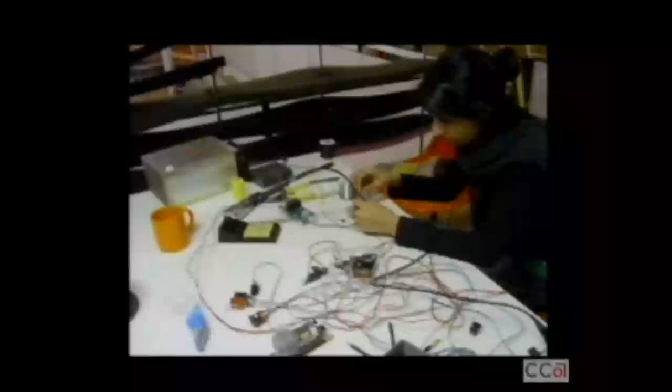We worked with Parul Vora from the MIT Media Lab to do the programming and the hardware. Basically, this is a diagram of the wall. It's supported by hollow tubes, and clamps onto the tubes are a series of interactive infrared sensors that detect proximity. These in turn signal microprocessors that activate servo motors that pull the bands of foam apart, creating sudden apertures in the wall. We started by testing one sensor in our office and then eventually built this up.

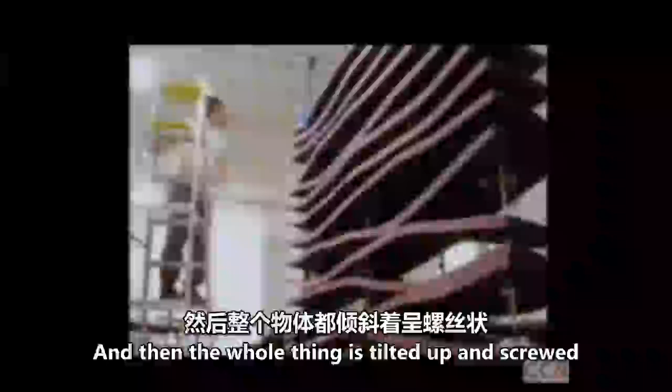So the construction logic is basically a shish kebab. All the pieces are laid out on the floor and then, like a shish kebab, skewered into the hollow pipes, which carry all the electrical and data wiring. This is an example of one of those locations. And then the whole thing is tilted up and screwed into the ceiling.

This is a close-up of one of those servo motors that pull the bands of foam apart. The section on the right is the at-rest state, and the section on the left is when it detects your presence. So this version of Party Wall responds to proximity, but we really imagined it as a prototype that would respond to heat or light or sound in other future iterations.

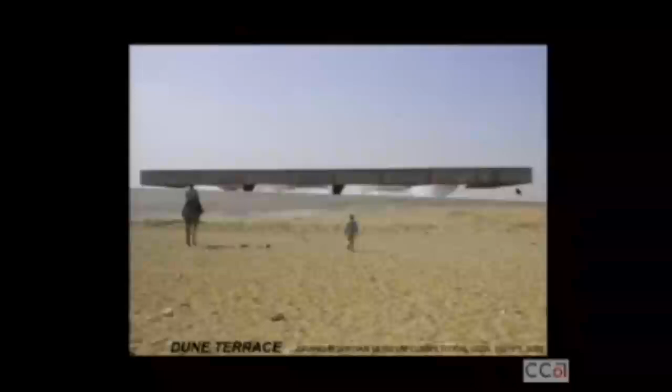The next project continues this idea of a loose armature that allows users to configure spatial relationships. Dune Terrace was a competition for an 800,000 square foot museum in Giza, Egypt. The permanent exhibitions are in that floating bar above, then there are 5 lobby gates, and then the special exhibitions and everything else is below.

The location was about half a mile away from the pyramids of Giza, and the brief described a very large daily visitorship. We started to think of the museum as a kind of cultural portal to the other archaeological sites in the area.

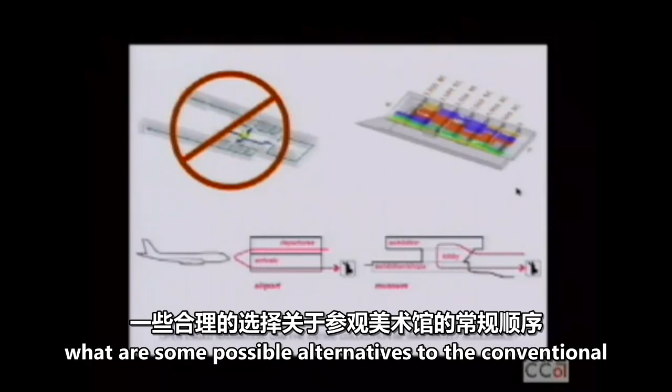This is the site plan, it's kind of on a plinth overlooking the pyramids. We started to question the navigational determinacy of the typical museum circuit, which we felt was monumentalizing circulation, where you always enter at the lobby and always circulate around. So we asked, what are some possible alternatives to the conventional gallery sequence?

Given the increasingly varied museum-going public and the volume and flow issues, we started to think about the airport, and we borrowed the airport model, which for us was a way to offer more varied and at the same time more precise trajectories into the museum. So the visitors arrive onto the Dune Terrace, which is this exterior plateau overlooking the pyramids.

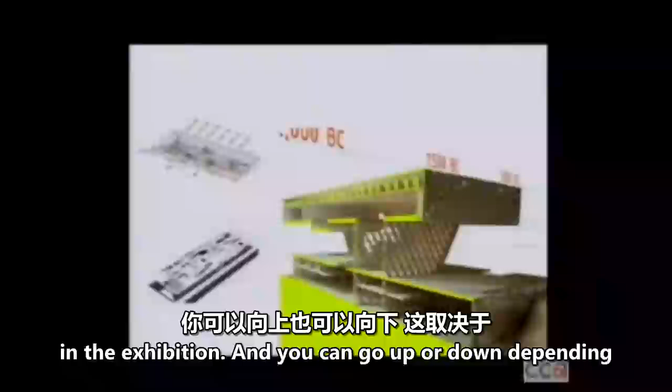And in the spirit of airport departure gates, you can choose from 5 different lobby gates that will take you directly to a certain location in the exhibition. You can go up or down depending on whether you want to go to the permanent collections above or to the special exhibitions below. This is a sectional model slicing through one of those lobby gates.

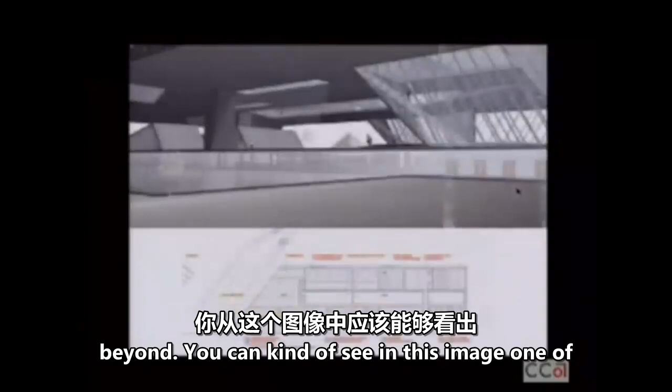This is the upper plan of the permanent lobbies, the permanent collections above. It's organized east to west chronologically, and intermittently there are these thin bands we call concourses, which are where all the digital projections were. Ultimately we saw this museum as a matrix of many possible routes and destinations that would offer everything from the traditional circuit, to an easy overview where you can sample all the lobby gates, to random browsing, to direct access.

This is maybe 1/100th the size, but we're still working with the same ideas many years later. This is Endless Table, an exhibition design we did for the Drawing Center in Soho. It was to exhibit Frederick Kiesler's drawings. Frederick Kiesler was an Austrian architect who immigrated to the States before World War II.

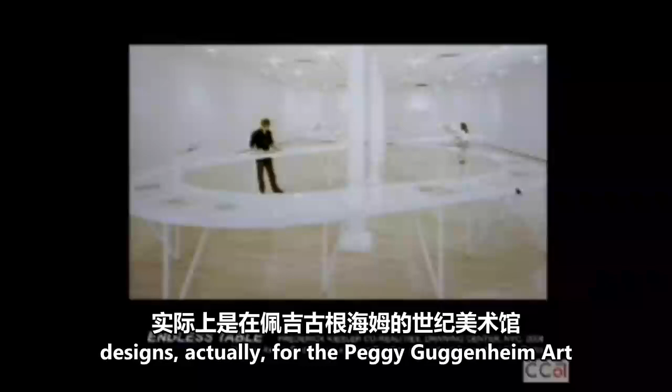He's most famous for his exhibition designs, for the Peggy Guggenheim Art of the Century Gallery, where none of the walls were orthogonal or straight, and none of the paintings were parallel to the walls. He's also very famous for this house, which he worked on for most of his career, called the Endless House, which is very contemporary now. Philip Johnson labeled him the best-known non-building architect of our time. I don't know if that's a compliment or not.

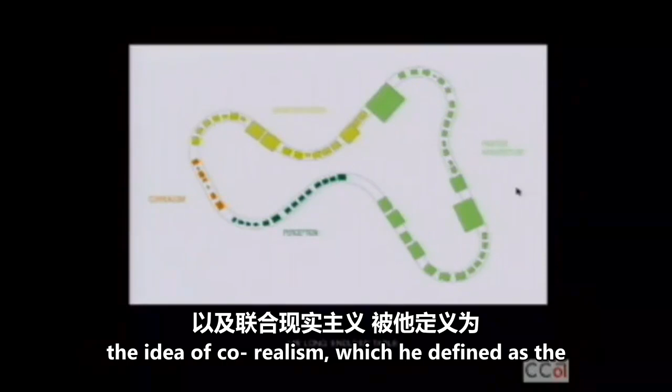So we designed a 145-foot long table, an endless table, that collected all of his drawings in all the different fields he was working in. For us, the challenge was to address his salient ideas without aping him. Those are mainly the idea of endless space, the idea of co-realism, which he defined as the correlations between things being more important than the things themselves, and third, the idea that perception is a constantly mutable, changing construct.

So this is the plan. It snakes around the gallery, exhibiting all 70 drawings in this kind of endless loop winding around. This shot of the security camera gets at this idea of correlation between the viewer, the object, and the space. The Drawing Center's mandate is to exhibit two-dimensional work.

For the first time, I think, we didn't use any of the walls, because typically they only exhibit things on the walls. So the thing unfolds and winds its way around, and you cannot see all of the work at once. You have to experience it in motion. We were really interested in creating this singular gesture that contained within it a great variety of perception of the work, a great variety of experiences.

Most of the sketches fit within the table. The larger ones are in these tilting panels, the larger they are, the more vertical the tilt is.

And you see how smart we were to choose white, because everybody wears black at the opening, so it really popped out. We were very interested in the idea that within this singular gesture you create multiple perceptions, but also that what was important to us was the shape, of course, but also the void that is created and the varying relationships across the void.

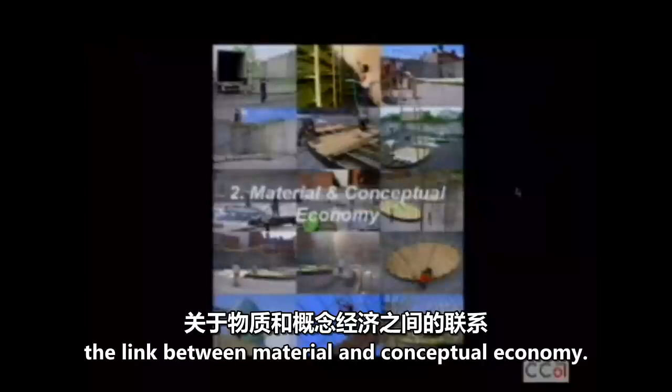So the next three projects I'd like to focus on our kind of obsession with the link between material and conceptual economy. This is in all of our projects, but mainly in these next three. We always try to overcome this divide between conceptually driven and tectonically driven projects. We are not so much interested in minimalism, but in achieving a maximum effect with a minimum of means. Sometimes this is simply a matter of budget, but we often limit the number of disparate systems in our projects in order to do more with less.

So this is our 2004 Young Architects project. It's the competition for the warm-up space at PS1, the Contemporary Art Center in Queens. It's kind of the cool sister to the MoMA in Manhattan. It's an old public school, actually, PS stands for public school. It's a museum, and in the summer it's this kind of oasis for people who can't afford to go to the Hamptons. So there's a lot of cultural identities to unpack and address.

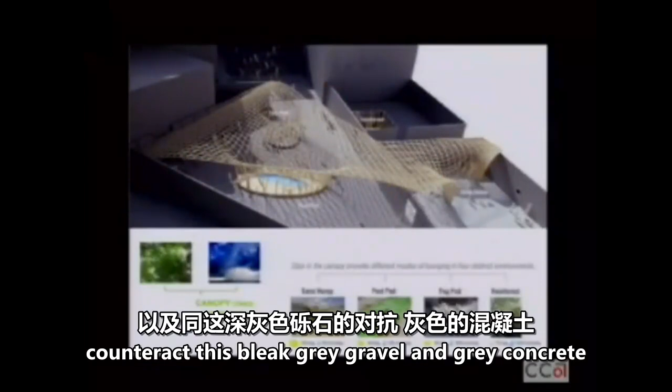This is the courtyard site, and what's very special about this site is that when you enter the courtyard, all the sounds of the city are dimmed, and all of a sudden your focus is on the sky. So we wanted to simply connect the sky to the ground with what we called a deep landscape, and also counteract this bleak gray gravel and gray concrete of the courtyard by introducing some color.

The term canopy refers to the upper regions of the tree, but it also refers to the cloud coverage in the sky. We started to think about how we could create very distinct environments that would provoke different modes of lounging, and that's what this diagram is about. Every environment has a different saturation point of water, a different scale, and a different sense of lounging.

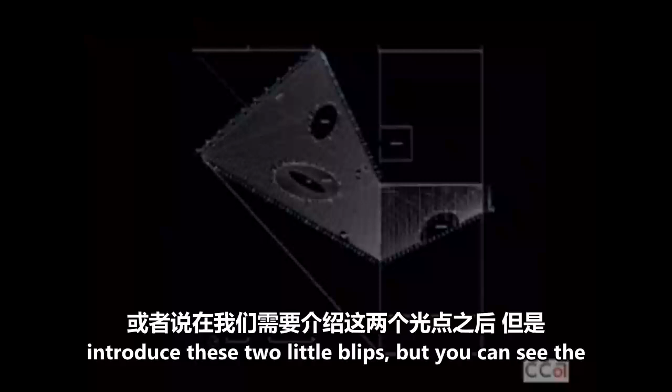This is actually the plan that we did after the fact, after we had to introduce these two little blips where you can kind of see the radiating grid. And then this is looking from the entry into the museum.

We looked a lot at Frei Otto's work and were very influenced by it. We wanted to avoid the catenary. Early on in the process, we met a bamboo consultant online who told us about a certain species that was flexible if it was green. So this is three poles strung together, and it is very, very flexible—three 20-foot long poles.

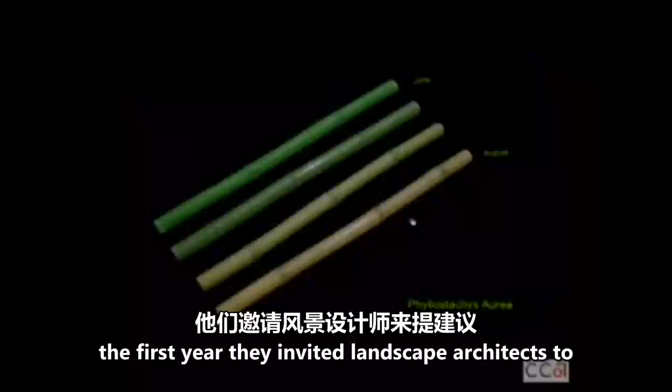That year was actually the first year they invited landscape architects to also submit, because it coincided with a landscape show at MoMA. So we wanted to address themes typically within the domain of landscape architecture in our project.

The green bamboo was supposed to turn tan, pale yellow, by the end of the summer. In fact, this happened in July rather than August—much sooner than we thought. You can kind of see in this image, the thicker poles and vertical orientation stayed greener longer, while the ones that are horizontal and thinner became yellow faster. This photo was taken at the end of the summer, where it's really quite brittle and bone dry.

Another idea of the canopy was to create a variation of shade and shadow by pinching this grid, so there are different densities of shadow across the courtyard throughout the day.

These diagrams on the left allude to the idea of shifting toward amenities rather than program. We thought through the cultural identities of this museum, thought about the different users, and wanted it to make sense for all of them. We used these different user types to explain how we organized the courtyard—so the barfly is only interested in where he can sit, the beach bunny is interested in the sunny areas, etc.

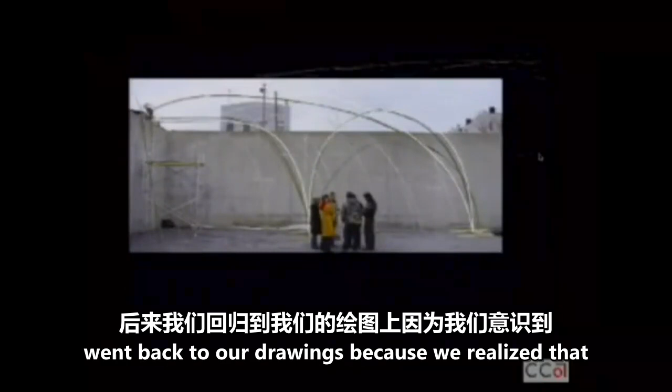You might recognize somebody from the audience in these photos—Matt Hutchinson worked on this project. We spent 6 weeks testing in the courtyard, testing all of the details: the small spans, the large spans, the base connections, the top connections. We went back to our drawings because we realized the 3D model we had submitted was too flat, and we needed to inject air and bump up all of the arches to increase the strength of all the spans.

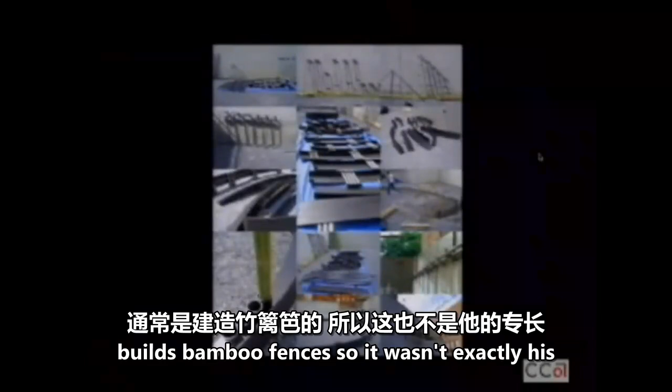And then we also looked at these critical moments of potential breakage in the bamboo, because through our testing we realized what the minimum bending radius was. This was all trial and error. We did work with this fantastic guy, but he normally builds bamboo fences, so it wasn't exactly his expertise either, and we just kind of tested everything.

This is the steel that arrived first, and the bamboo arriving from Dudley, Georgia, 1,100 poles of Phyllostachys aurea that were all organized according to diameter. They varied, but they're basically about 1.5 inches at the base, and they taper up to 1/4 inch, 1/8 inch at the top.

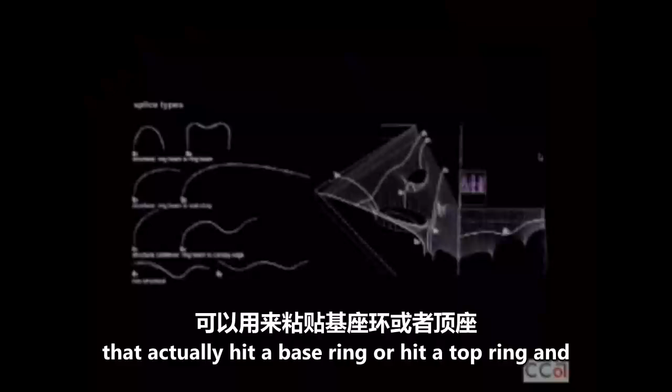We had to water them, keep them green and supple, and these are the basic splice types. So the structural ones went in first, which are the first two, the ones that actually hit a base ring or hit a top ring, and then the non-structural ones go in after.

This is the cleaned up diagram. It wasn't that clean when we worked on it. And then this is an example of the drawings that the crew built the project from. Each grid line is translated into a 2-dimensional drawing with all the intersections marked out. These are the typical connections.

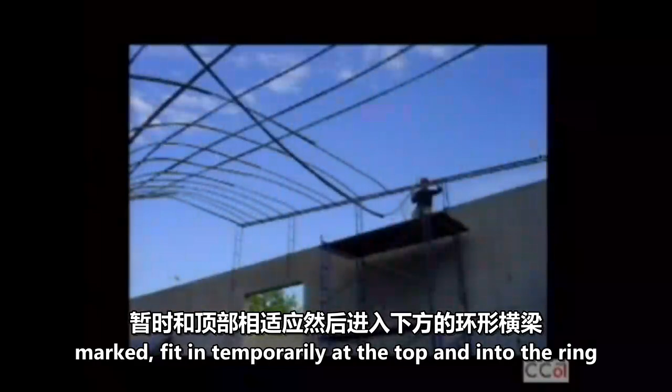And this is the process. Each grid line is laid out with the exact length, all the intersections marked, fit in temporarily at the top and into the ring beams in the bottom, and then the non-structural members across the top.

It was a very interdependent, very indeterminate structure, because you couldn't do all of the structural ones and then all of the non-structural ones. You had to build it in areas in a kind of egg crate fashion and then expand those areas, which is what this sequence is diagramming.

And again, some more examples of the drawings that we used on site. So the red would be the grid lines that were going in next, and the gray is what is already there. So this is a very elaborate organization of how the thing goes in. And then this is a view, and you can see all the zip ties that are there.

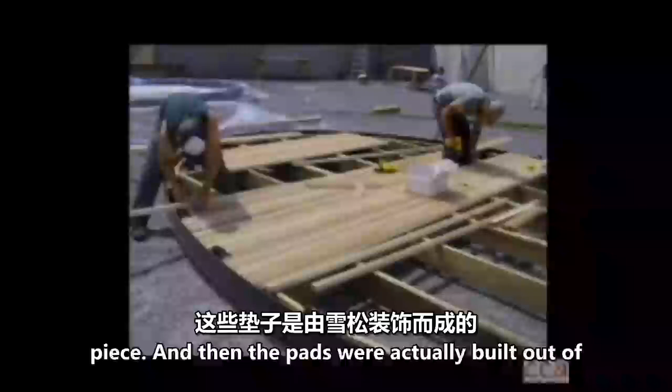This is another element, the pool, which was made out of foam and then sprayed with polyurea. It was kind of an underwater furniture piece. And then the pads were actually built out of cedar decking, and the sides were painted with road paint so that the light from the underside would glow at night.

And then in the smallest room, we planted the same species of bamboo. So during the summer, while the bamboo outside was turning brittle and tan and drying, the bamboo inside, what we call the rainforest, was growing and growing and growing like a weed.

And then slowly all the zip ties were replaced with stainless steel wire, because it was very important to us that the kind of third world associations of bamboo were not there in the final product. We wanted it to look very precise and very engineered. And so these are the 3,000 somewhat nodes that were replaced with stainless steel wire.

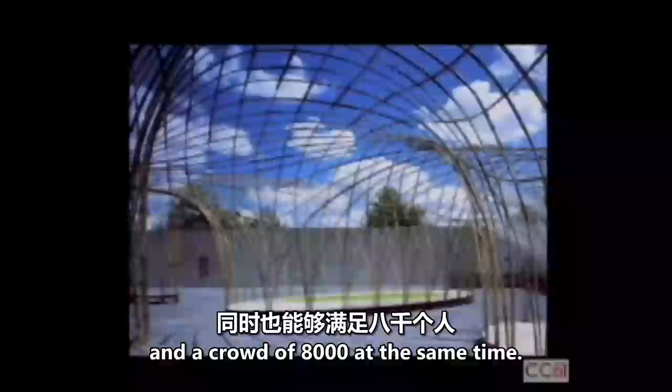And this is one of the Saturday crowds. It could swell to 7,000 or 8,000, and during the week the number is much less than that. So for us it was very important to do a project that made sense for a crowd of 1 and a crowd of 8,000 at the same time. We wanted it to register.

This is the pool pad that you see, and then on the left the dry environment, the sand hump, and then here one of the two small little dips in the canopy that we introduced just before the opening, because we realized that we could not do that span. We could not span from here to there, and so we introduced two new dips in the project, which I think made it better.

This is the fog pad, and this is early on in the summer, so when it was dry, when the weather was dry, the fog would dissipate almost immediately. Later in the summer it became much thicker.

So right after Canopy, we received a commission to do a 7-story condo building in the Lower East Side, right around the corner from our office.

It was really a stroke of luck. The client, whom you see on the left, walked in off the street and said, I have a building, and I want a stainless steel facade, and I need an architect. So we said, we're your guys. But it was a little backwards — he had already dug the pit and was ready to place the elevator core. So can you help me?

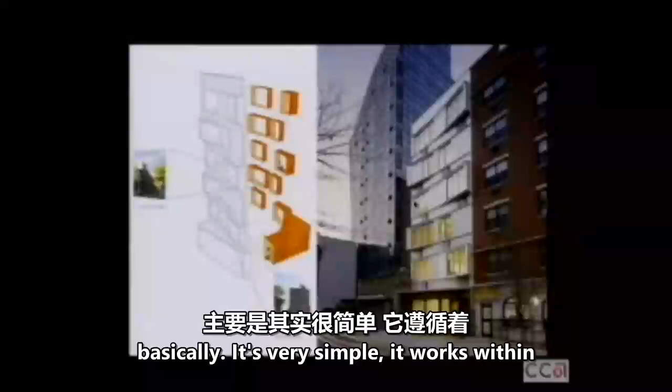So we designed it in 3 weeks, basically. It's very simple. It works within the developer logic of economy and repetition, and our challenge to ourselves was to create as much variety and difference as possible within that economic model of repetition.

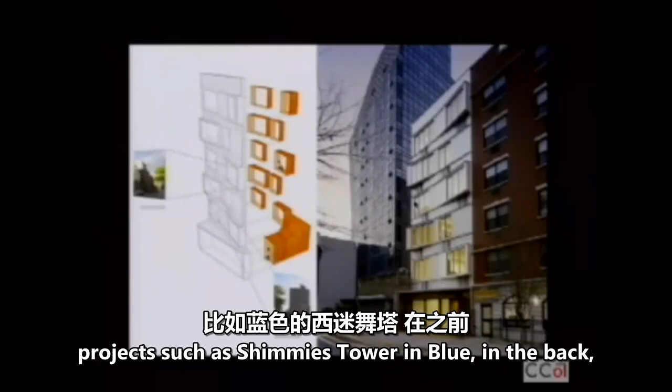So the idea of switching refers to switching of views, switching of light conditions. For us it was very important, considering the Lower East Side was rapidly gentrifying at that time, and there were projects like Tschumi's Tower in blue in the back capitalizing on the setback regulation, where if you set back far enough you can go taller. We really wanted to maintain a strong connection to the street, so the idea of the switching facade is literally the inhabitants occupying the skin.

It is a piece of furniture basically on the inside. It's a bench.

When the developer approached us, he came with a typical wish list of bay windows, balconies, and so on, and we really wanted to take these and not make them separate attributes of the facade, but create a singular conceptual idea out of it.

So we looked at a lot of bay windows, from the very small to the very bizarre, in the area, and we tried to take that and create a singular gesture out of it.

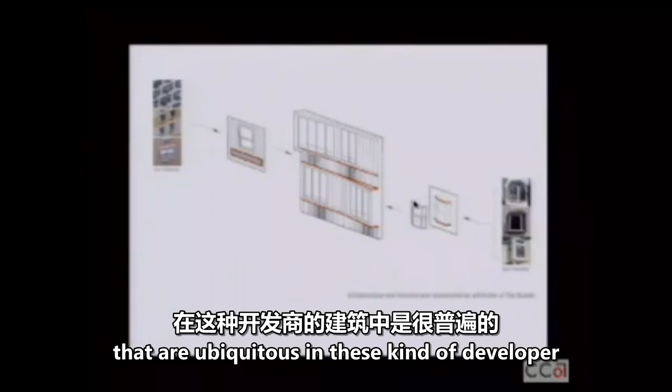The other thing was that we really wanted to do something with those air conditioning grills that are ubiquitous in these kinds of developer buildings, and to incorporate them into the tectonic of the facade. This is interesting because it's almost like it's anticipating an air conditioning grill.

So the switching is an idea at the urban massing level, but it's also an idea at the facade level. Over the air conditioning grills, the skin kind of goes from flat to perpendicular to the air conditioning unit, then back to flat again.

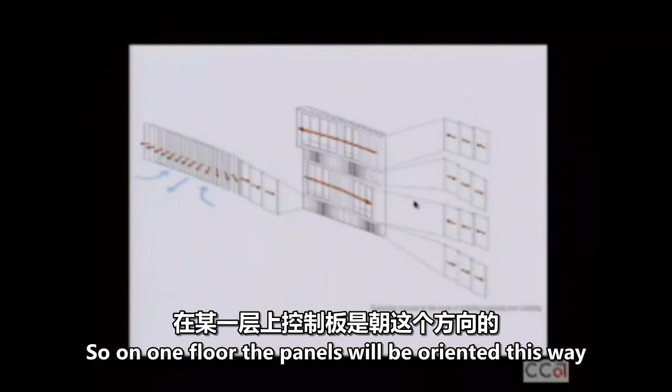And then the cladding also switches — on one floor the panels will be oriented this way, and on the second floor the opposite way. So from the outside as well, the light and shadow effects are quite different from one approach versus the other.

And then from the inside, this kind of facade, piece of furniture facade.

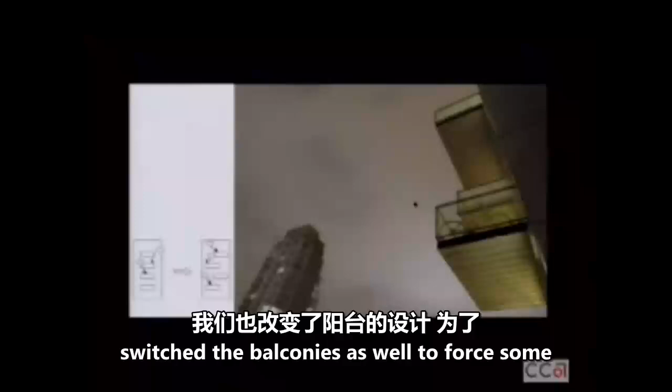So we thought it'd be fun, in New York, to force some neighborly interaction. So we switched the balconies as well to force some communication, and it actually does work — the people are very close in this building.

The facade is galvalume, not stainless steel, a lot cheaper. And the balconies you're looking at — the glass has a green stripe on it, so a little bit of color, but you can still see through it.

When we started working on this project, there were a couple of galleries opening in the area, and now it's actually quite an important gallery district. We really argued to have this double height space because, unlike Soho and unlike Chelsea, the galleries in this area are really small, generally housed in these tenement buildings.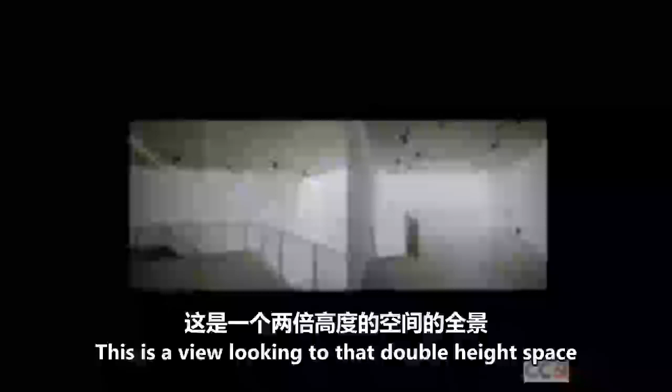This is a view looking into that double height space in the gallery.

The sawtoothing of the ceiling is basically the same. It's a material called Versarock — the same material as the sheathing behind the galvalume on the exterior. So it's as if that's kind of coming in and wrapping on the underside.

And then this is the residential lobby. It's very, very tight, so we used a visually rich, warm, and kind of busy material — it's plywood on end.

And the penthouse — the best view is from the bathroom.

This is a project that is in our office right now. It's for ABC, which is basically Macy's in Lebanon. It's the oldest department store in Lebanon. It is here, in the northern part of the city, on the main north-south highway, and it overlooks the Mediterranean.

This is the existing building, so it's not too hard to come up with something a little better than this. We're working with an existing building, and we're recladding the facade, obviously giving the store a new identity.

Given the location on the highway and the car culture on that site, we started thinking about highway billboard signs, playing with that. This was an early option that we didn't go with. This is their logo on the left, and what we came up with was a lattice out of their logo where we varied the density and the gradient across the facade. This is actually an earlier model, and it's now much simpler.

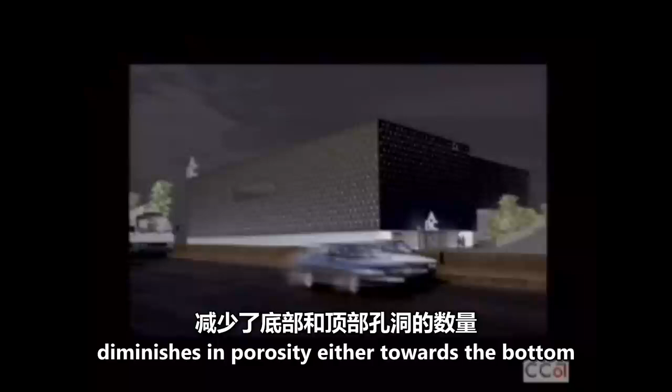The gradient is much more simple now. It basically diminishes in porosity either towards the bottom or towards the top, depending on where you are. So each facade, that gradient orientation and direction is changing, so as you wrap around the building, the weight of the light is in a different place.

The third idea I'm going to talk about is climate as strategy, climate as a catalyst for how one organizes the building, basically how climate can shape the very morphology of the building. Maybe it's because I've been procrastinating my LEED exam, but we're very suspicious of this checklist mentality in sustainability, filling in particular requirements, and we're really trying to look at climate as a conceptual driver at the very beginning of the project.

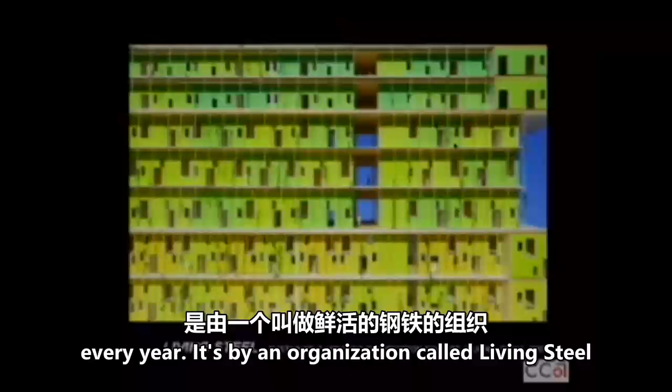This is a competition we were invited for. It's staged every year by an organization called Living Steel, always in a different city. The brief is to design innovative, high density, low income housing using steel in a sustainable and innovative way.

Our location that year was Wuhan, China, one of the four furnaces of China. It's an extremely hot, tropical almost climate. The massing was given to us in a way, so within these constraints we worked with an idea of creating variation in typology that would connect to an idea of demographics.

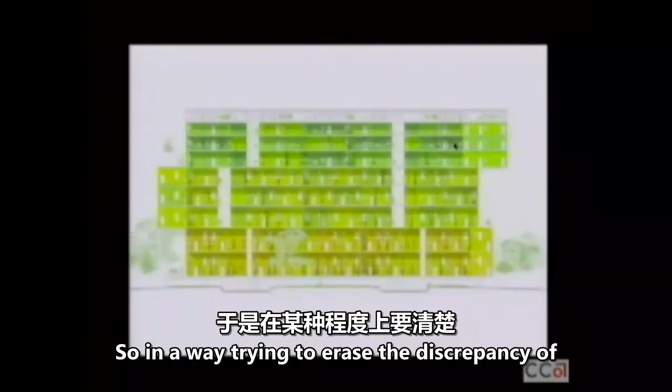We created a house type and a very flat apartment type where the floor-to-floor height changes as you go up — higher on the bottom, lower up above. Essentially, the volume of each apartment is the same throughout, in a way trying to erase the discrepancy between the most desirable unit on top versus the least desirable on the bottom.

This is the south facade, which is actually a single loaded corridor. The facade is made up of SIPs, structurally insulated panels. All of the wet functions are arranged along this facade, and within it, it also collects rainwater for grey water use. This is a diagram of the consistency in volume of apartment as the actual proportions change as you move up.

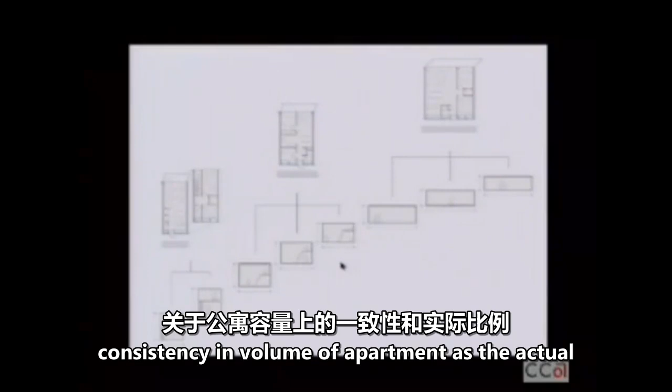Typically in housing it often becomes a kind of puzzle, a game of combining as many different units as possible in an intricate three-dimensional puzzle. For us, we saw it as a card game, where we thought if we could just free up the plumbing, which unfortunately dictates a lot of housing, you could actually stack any of the floors any way you wanted to.

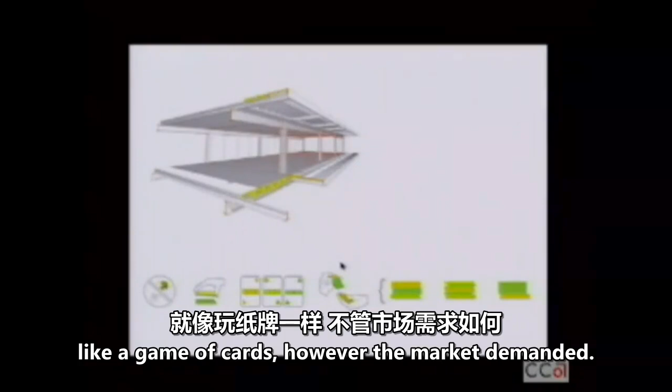The idea was that each developer could take the plans and rearrange the floors like a game of cards, however the market demanded, deciding how many townhouse units versus apartment units were needed, because the structure was simply in the north facade and in the south facade, and all the spanning walls in between were non-structural, so those were very flexible. The left is the north facade, which, unlike the south, is just trying to direct ambient light in, and you can really see the progression of the apartment heights in that facade.

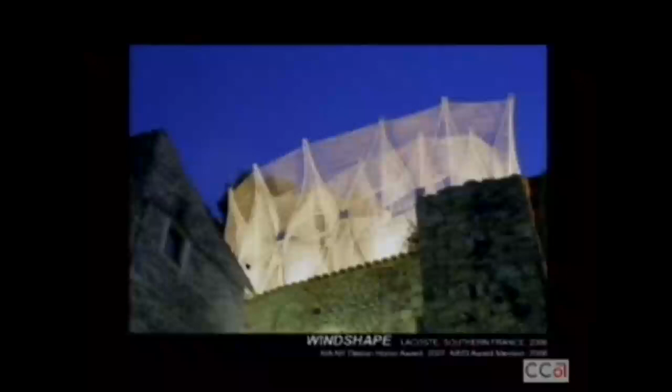So the next project is maybe the most literal illustration of this idea of climate as concept. We were commissioned by the Savannah College of Art and Design to design an installation. It was actually an art commission, but we're not artists, so we said we would do an almost architecture installation.

We did 2 pavilions that changed with the wind. We designed it before visiting the site. And so from our research, we found 2 things.

One, that the town of Lacoste is actually where the Marquis de Sade escaped to when they kicked him out of Paris, and his castle is right behind our site. And so we thought that would be very important, but it was not. The second thing...

...was that the area of France, it's in the south of France near Provence, has a very, very strong wind called the Mistral. And in the past, crimes of passion were excused during the Mistral. So that became important. So this is the site.

It is an incredible landscape of these small little hill towns, seemingly hewn out of the same limestone, overlooking this incredible billowy, swaying landscape of olive trees and cherry trees. And so, quite simply, we wanted to somehow blend the hard and the soft.

We wanted to, in a way, speak to the angular geometry of the stone and try to reflect the dynamic behavior of the landscape around it. So this is the site plan of the 2 pavilions.

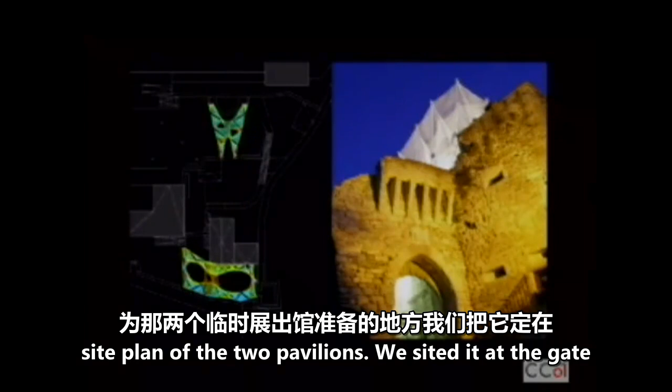We sited it at the gate, at the old fortress gate. In our minds, it was almost as if we were creating a fictional extension of those fortress walls, but inverting the heavy masonry logic and replacing it with something much more light and much more ephemeral.

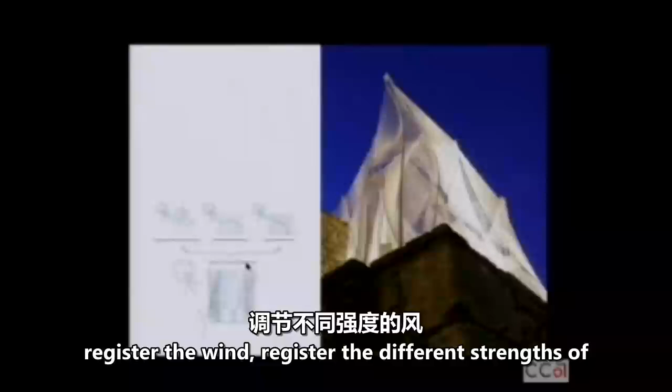So for us, there are several ways to deal with the wind. One is to let it pass. The other is to absolutely block it. We wanted to do something in between. So we wanted to do something that would register the wind, register the different strengths of the wind, and reflect it in a constantly mutating shape.

So this is what it's made out of. It's plastic pipe and string, very cheap polypropylene string.

What was critical in this project was really thinking about the construction sequence, because if you've ever tried to find a screw or a screwdriver in the south of France, you know what I'm talking about. They were all on vacation all the time. So we really had to think about a very basic kind of construction logic.

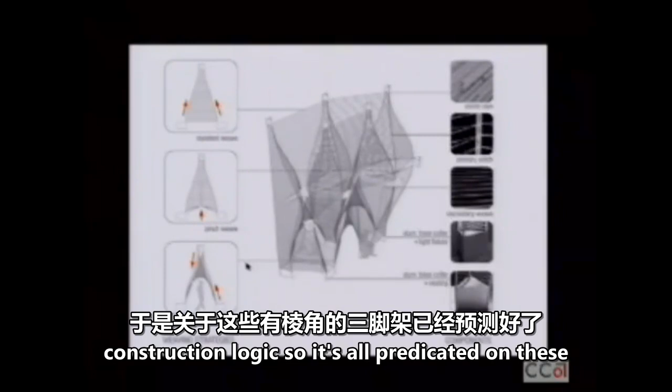So it's all predicated on these triangular tripods that are staggered to make up this thick masonry, inverted masonry wall.

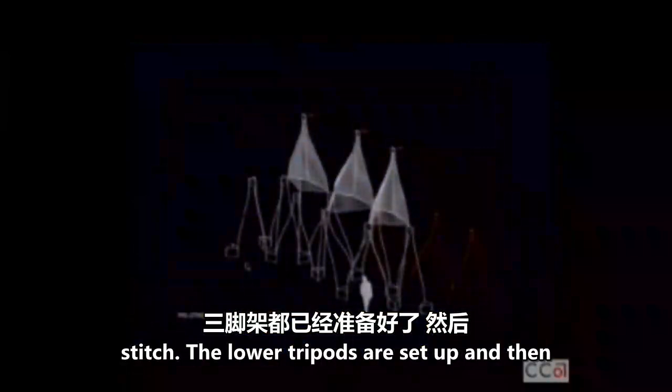So this is the sequence. Each pipe is drilled and stitched in a kind of primary stitch. The lower tripods are set up, and then the upper ones, pre-strung, are put into place loose, because we needed it to be quite flexible.

It was, we were not there, so all the kind of discrepancies of the site condition really changed everything. So it was quite difficult because the abstraction of our 3D model was not the reality. But anyway, these are the upper ones, and then the upper ones are strung together. The webs are put into place, and then repeated, the inner layer.

And a lot of this came from us looking at our canopy structure, and at this one location in our canopy structure during a windstorm that was kind of flapping in the wind, and we thought that'd be fun to build a structure that specifically responds to the wind.

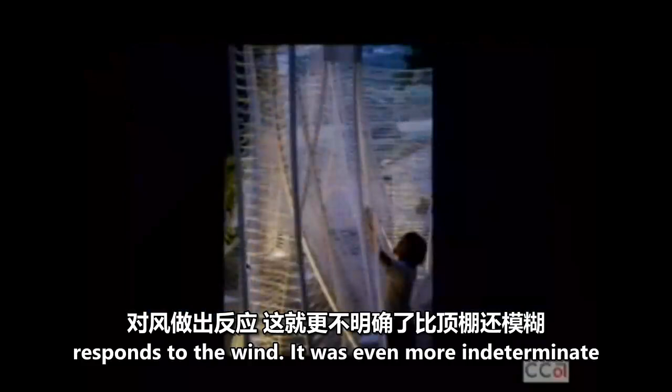It was even more indeterminate than the canopy. We actually never structurally modeled it. We built half of it in New York, but we had a lot of testing to do on site.

Villa Villa is a project that we think will be built. We're not sure. There are different phases to this project, and the first phase has started construction. It's a house in Inner Mongolia, China. The client is a developer who, among other things, made his money on milk, Mengniu milk, if you've ever heard of that. Not one of the tainted ones.

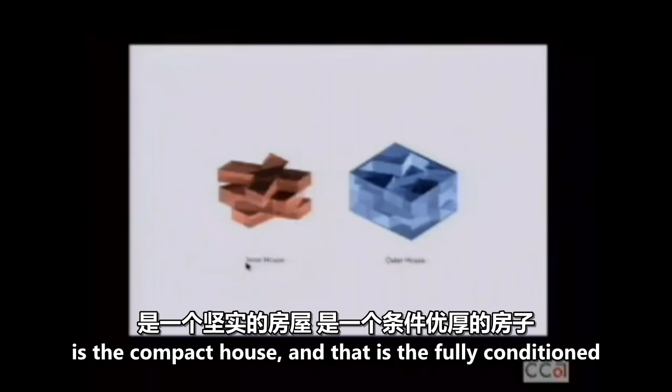and the outer house, which is what you want. The inner house is the compact house, and that is the fully conditioned house, and the outer house is the spillover space during more temperate conditions.

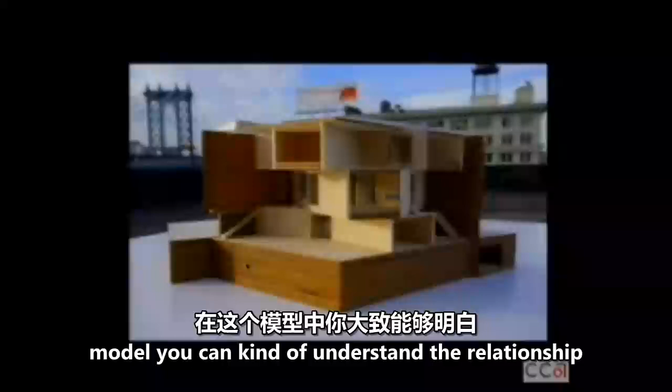So these are the 3 floors of the house. In this model you can understand the relationship between the inner house and the outer house. The outer house is this kind of spillover space. The inner house is horizontally stacked, and each floor has a very different connection to the landscape.

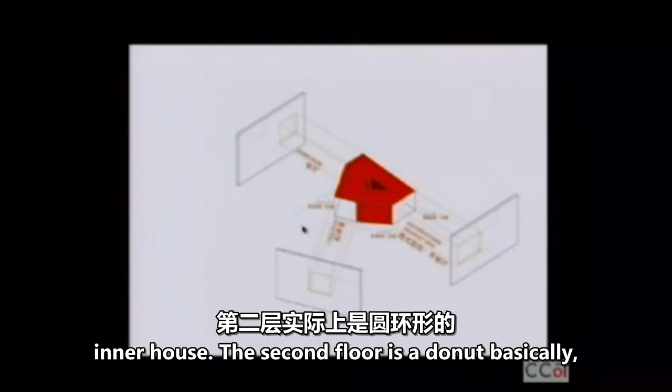The second floor is a donut, basically. It's a totally open space with all the living space, the kitchen, living, dining area, each with their own orientation again. And you can see in this plan, this is the inner house. This little bit is the ceiling of the first floor, and so that is part of the outer house.

And then lastly, the bedrooms, north, south, east, west, each one with their own particular orientation. And then again in the plan you can see this is the inner house and this is the outer house.

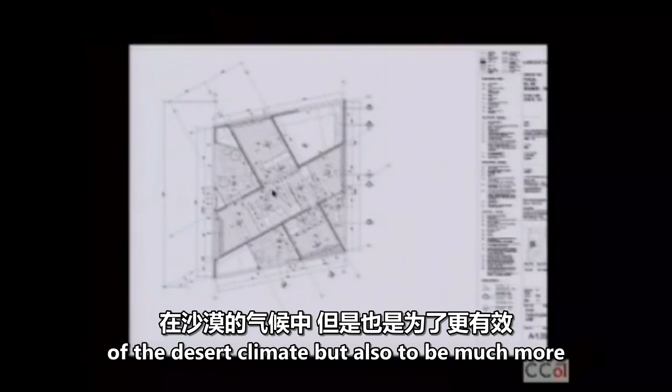So really the idea of the layering for us was a way to respond to the extreme temperature swings of the desert climate, but also to be much more efficient about where we put money in materials, where we put money in terms of all the more fine detailing, and where we can be rougher and cheaper.

Essentially what we were trying to do with the 3 floors was to create as much variability as possible between them, but structurally make it as simple as possible. So this is the structural plan. The red is the 3rd floor, the blue is the 2nd, the gray is the 1st, and you can see that each of the floors is basically spanning from one of these columns in the middle to the perimeter wall.

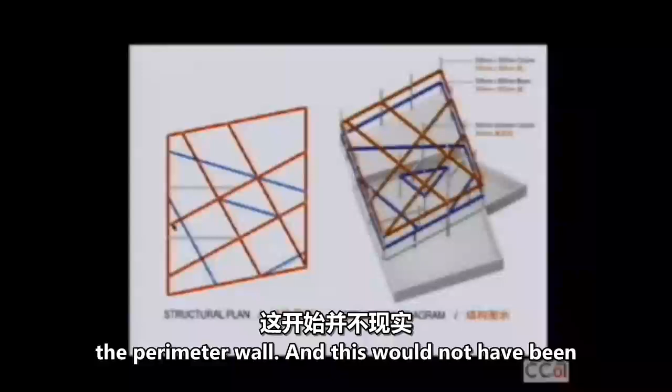This would not have been possible without parametric modeling, and we used it in a very simple way. Because of the budget and the distance of this project, knowing that we couldn't walk around the block and control it, we were searching for what to standardize, what to make simple. In the beginning we thought it was important to standardize all the windows, but eventually we relinquished this and understood that it was more important to make the structural logic really simple and minimal.

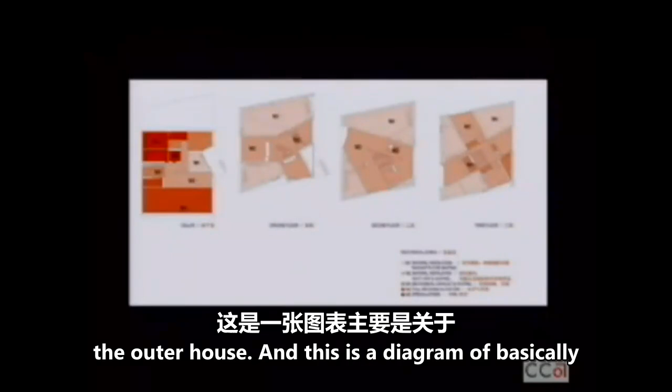And this is a diagram of basically 2 main mechanical zones, the fully conditioned one and then the partially conditioned one. The idea was that in the very extreme heat of the summer and the very extreme cold of the winter, you would retreat into the inner core, and in the more temperate seasons you could passively heat or cool the outer house by opening up the sliding partitions that close the inner from the outer.

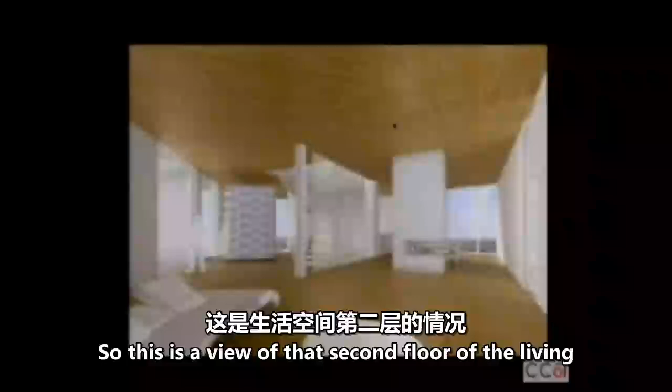So this is a view of the 2nd floor of the living space that is a donut, and these are the kinds of views we were really interested in - this view to the outer house, then the view to the outside, this layering of different thermal zones, and a view of the outer house and inner house at the same time.

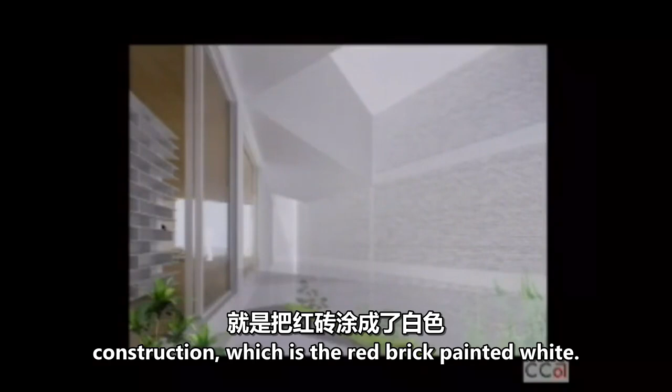So the inner house is where we put all the money, it's where the materials are, much more warm, much more polished. The outer house uses a very typical Chinese construction, just red brick painted white. So the outer house, in contrast, is white, abstract, and rough, and the lighting only comes from the top, whereas the inner house, the lighting is only from the side. This oscillation between fully conditioned and partially conditioned, side light versus top light, warm materials versus abstract white - it was something we were interested in.

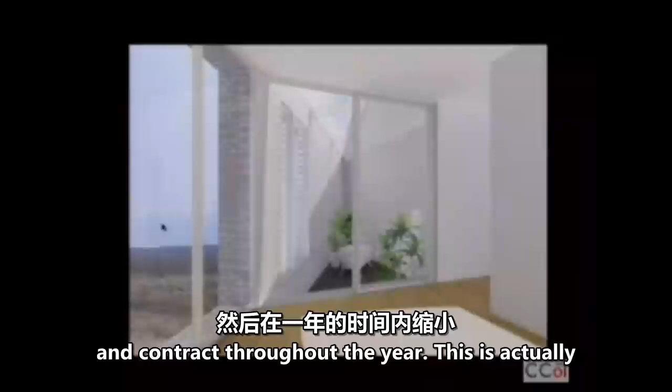And just the idea that living could expand and contract throughout the year. This is actually the view when you enter, looking up.

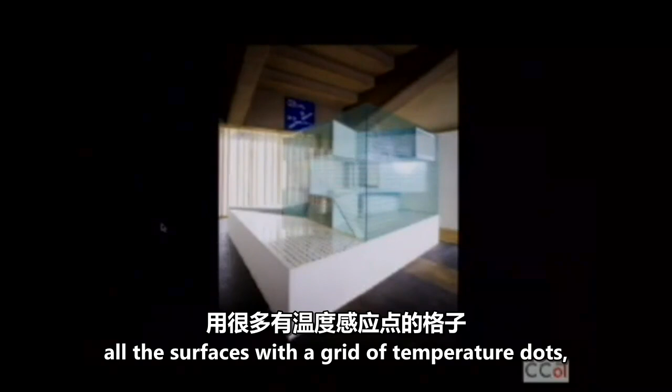And then this is the model - the scale was roughly 1 to 7.5. In the model we replaced the brick walls with glass, and we covered all the surfaces with a grid of temperature dots, indicating the temperature in the extreme cold. So the blue on the outside is really, really cold. The green that you see is within the outer house - that's something in between. And then the red is indicating the fully conditioned, heated environment of the inner house.

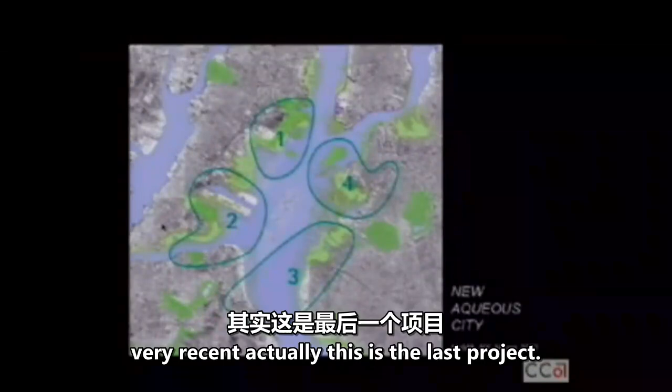This is very, very recent - actually this is the last project, we just finished this. This is New Aqueous City. It is a speculative project for an exhibition at MoMA that is opening March 23rd here in town.

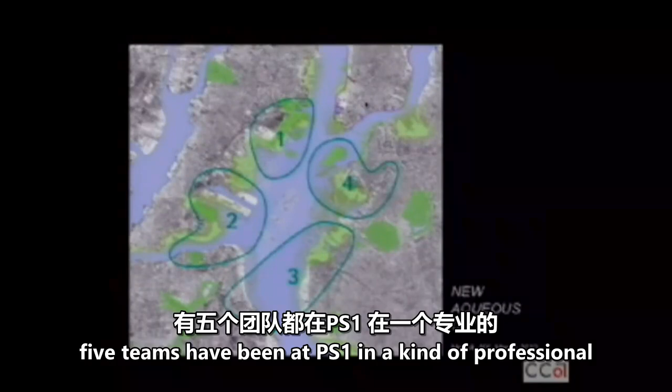MoMA is taking a huge risk with this exhibition because they organized the exhibition before they knew what the content was going to be. For the last 2.5 months, 5 teams - the 5th one is working on southern Manhattan - have been at PS1 in a kind of professional residency, proposing futuristic, provocative yet real projects about the Bay, about Palisades Bay, dealing with the issue of rising sea level and the increased frequency of storm surges in the future.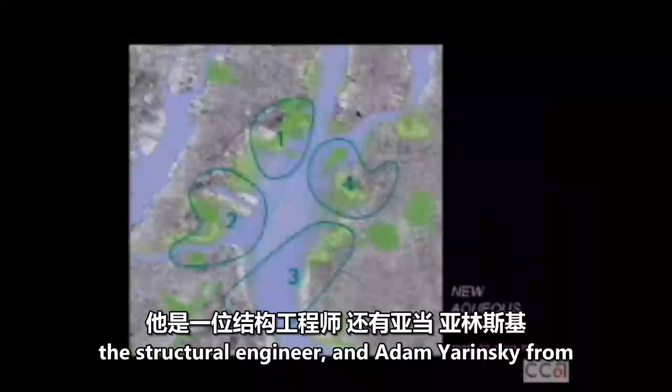So we are each dealing with a different site. Ours is this one - this is the Verrazano Bridge, Brooklyn, Staten Island, New Jersey, southern tip of Manhattan. The way this started was actually with a book, with research that Guy Nordenson, the structural engineer, and Adam Yarinsky from ARO and Catherine Seavitt did, looking at New York and this problem of rising sea levels, trying to find an answer that is not hard engineering, a kind of counterpoint to the typical storm surge barrier proposals that are out there, and just trying to find opportunities for architecture and landscape architecture.

So this is our site. It is defined by Sunset Park and Bay Ridge, the bridge, and Staten Island to the west. Out of the 5 sites, it's kind of the largest in area, and it is the most varied in terms of social, physical, and economic conditions.

And so for us, the interest in the project was not to - it's such a huge problem - we approached it not as a specific design of a specific area, but more trying to show a window onto how a city might grow in the near future as well as the distant future, in order to adapt to our soon-to-be very aqueous condition in New York.

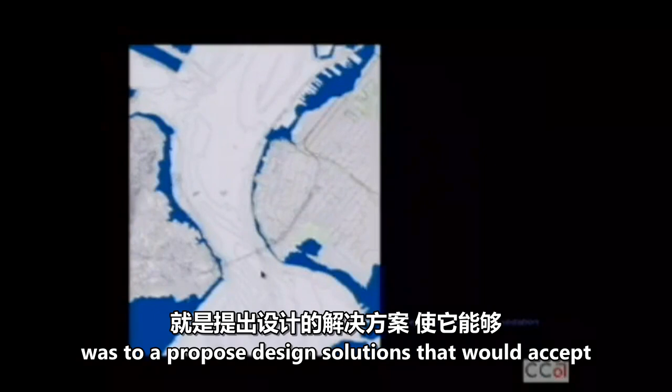So the blue shows the 20-foot inundation zone, which is what would be flooded in a Category 3 storm in New York. And so our challenge was to propose design solutions that would accept this new aqueous condition, and for us to reimagine urban living in this new aqueous city.

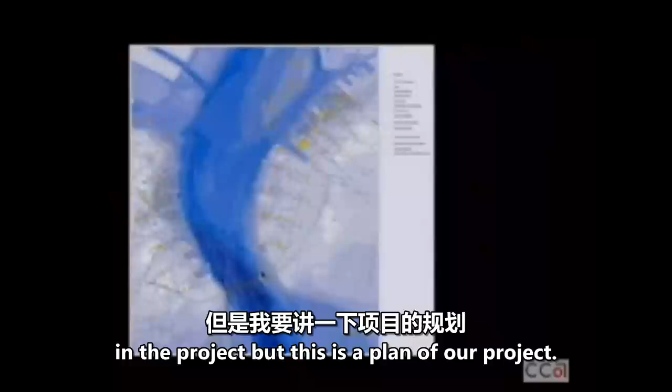So I'm not going to go through everything in the project, but this is a plan of our project. I want to focus on 3 aspects of the project, moving from land to water in terms of 3 different resilient strategies that are very interdependent. The first is a series of islands and barriers. The second are these piers that also serve as ferry stations. And the third is a new aqueous building typology.

So this is actually a storm surge barrier that is being proposed. This is our site, the Verrazano Bridge. And this is very similar to the one in the Thames, and also very similar to the one in Zeeland, in Holland.

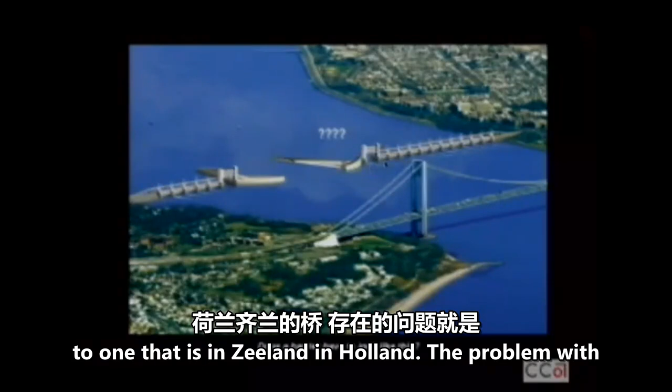The problem with this is that it really constricts the flow of the river. The bay actually flushes out twice a day, diurnally. And so anything that is always there in terms of a proposal is bound to harm the ecological balance of the bay.

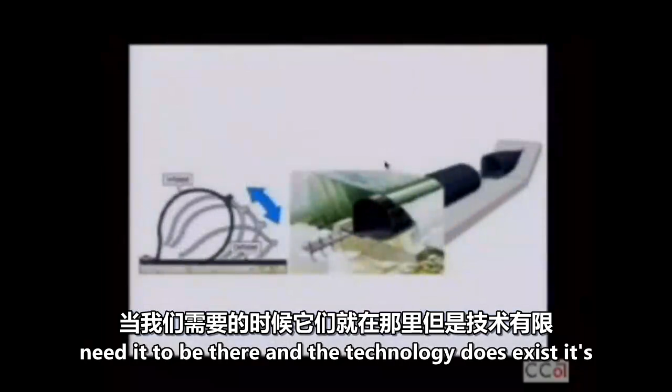So does a barrier have to look like that, or could it look like this? We actually proposed to create islands that could act as a barrier when we need it to be there. And the technology does exist, it's actually implemented in 200 different locations. So what we were proposing is a series of islands with dynamic inflatable barriers that are deployed in a storm surge and otherwise disappear.

So I'm showing you some bits of the exhibition. This is one of the animations in the exhibition. So this is the idea of the islands, and this is the inflatable barrier deploying.

What it would do would basically be to hold the water at bay on one side and to break the wave energy. But more importantly, 99.9% of the time, what is actually there are islands, natural habitats. So for us, the idea of a solution to this problem of rising sea level is not to see it solely as an engineering solution, but to look at merging engineering with landscape.

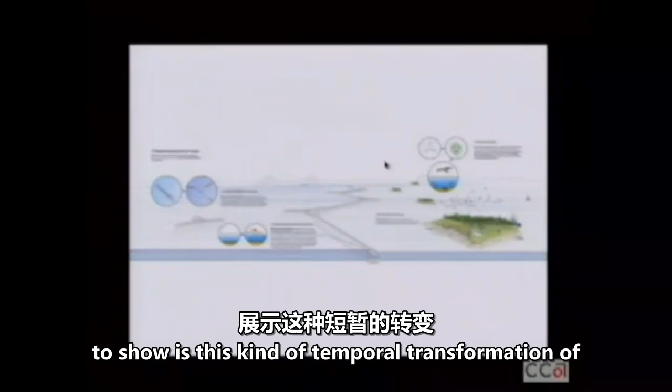So we're quite fascinated with this idea of proposing hard solutions that eventually accrete sediment and sponsor natural habitat over time. This is part of one of the panels in the exhibition. Moving from left to right, we're trying to show this kind of temporal transformation of the hard engineering solution, eventually accreting sediment from the down current and sponsoring a natural habitat.

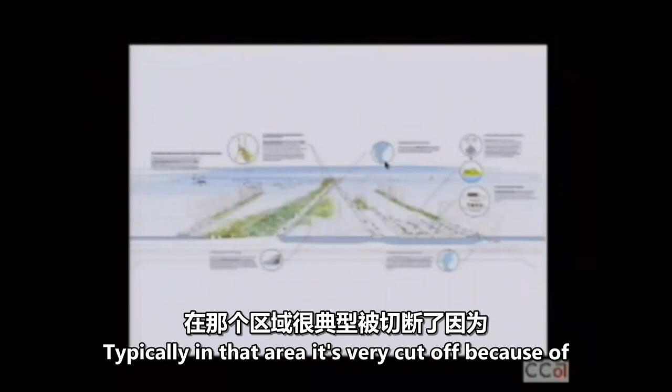The second aspect of the project are these series of piers that also double as wave breakers and ferry stops. We imagine that the piers are part of this now very public waterfront. Typically in that area it's very cut off because of industry, and we started to reimagine programs along the waterfront as mobile programs.

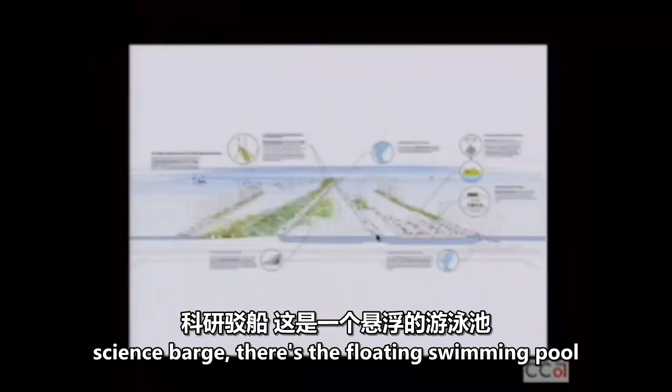So the idea would be that the pier, the wave-breaking part on the up-current side, is fixed. On the down-current side, it's actually floating, which also helps to break the waves, and all the program is floating. There are examples of this in New York: the floating science barge, the floating swimming pool during the summer. So we imagine floating markets, floating libraries, and these kinds of mobile programs activating the waterfront.

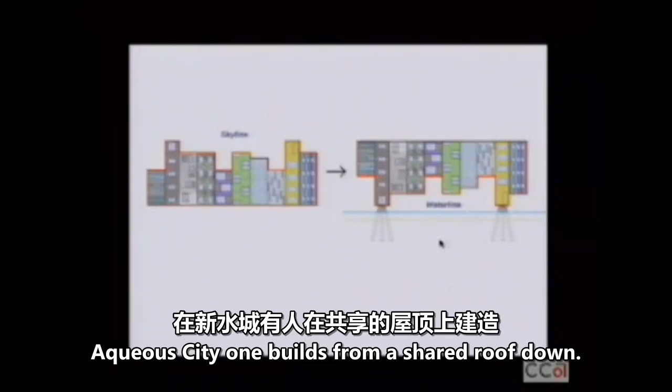The last aspect we looked at was the residential neighborhoods, or the mixed-use blocks. If one typically builds very sensibly from a shared street up in a city, in New Aqueous City, you build from a shared roof down. So the shared roof goes in first, and then the houses go in. Basically, the more risk you are willing to take, the lower you hang your house.

This actually has precedent in terms of how FEMA works and how national insurance worked in New Orleans and other floodplains, where they will only insure up to a certain floodplain. So it's putting that on its head in a way.

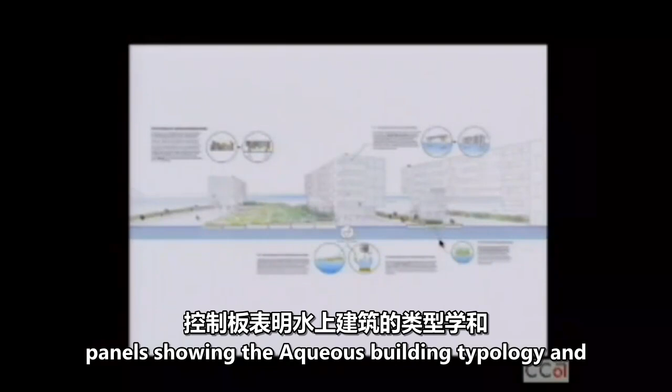So again, a little slice of one of our panels showing the aqueous building typology and this idea of a floating treatment wetland, where the waste from the mixed-use blocks would be treated. The dry waste is treated inside, the wet waste goes through an anaerobic digester and then flows down these floating modular wetlands, eventually discharging clean water, not smelly water, into the river.

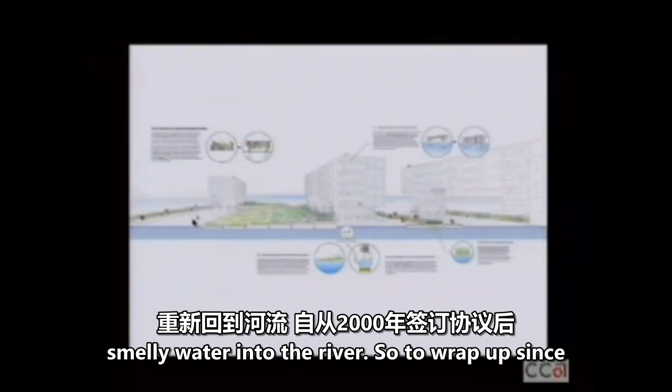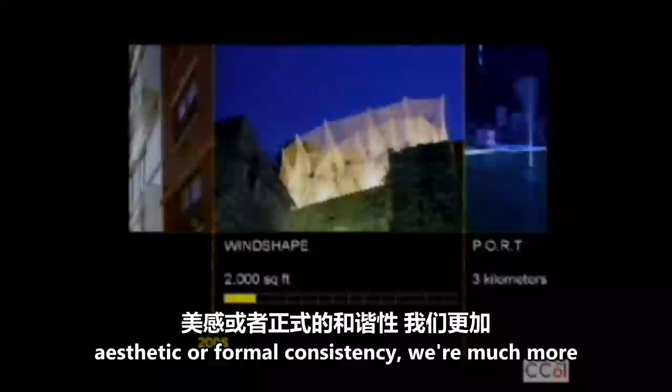So to wrap up, since 2000 we've tried to address a wide range of scales in our work, from buildings to interiors to installations, and more recently the urban scale. Regardless of scale, the questions we're always asking try to go beyond the conventions of program, type, and context. We are not so concerned about aesthetic or formal consistency. We're much more concerned about whether we're asking the right questions and whether we're framing the problem correctly.

And basically the same range of scales are in the current projects we have in the office right now: the ABC department store, a maintenance and repair shop for the Department of Transportation, and a 3,300-foot-long linear park in Buffalo, New York.

And I just wanted to finish with the dismantling of Canopy. We sold it to Matthew Barney, who wanted bamboo for his then-latest movie set, and we just needed to make some money, so we told him it'll be straight when you dismantle it. But really, we were not sure what would happen, because it had been up for five months, conformed to this very precise geometry, and we just kind of gave them a sketch and said, cut here. The fascinating thing is that as soon as the pieces hit the ground, they flattened immediately.

So what, in fact, are we really in control of? The way in which we formulate the design problem, hopefully scaling and situating our ambition for each project, and a critical leveraging of our production tools. The list of what controls us and our work is too long and boring to get into. Somewhere in between are the moments where we happily relinquish control, as in the multiple interpretations and misuses of our environment, the varying relationships between our work and its environment or its inhabitants, and the productive influence of fluctuating external conditions. This is ultimately where we try to aim our efforts. Thank you.